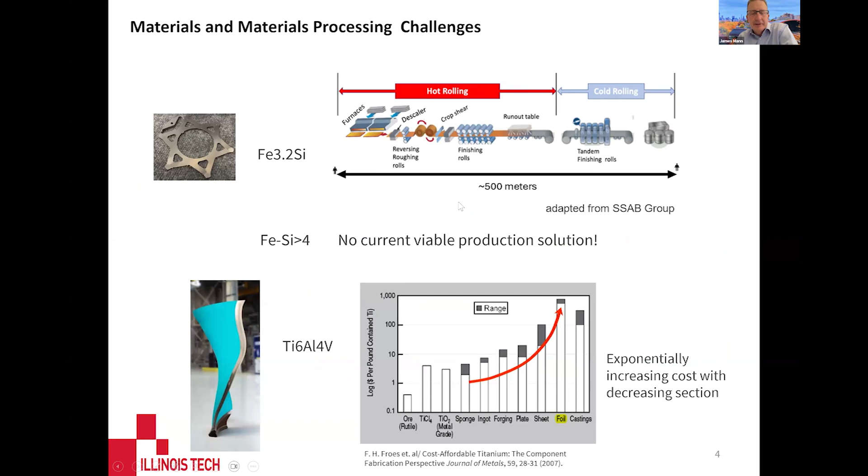Okay, so today I'm going to talk about machining-based deformation processing of materials, or materials manufacturing by machining-based deformation processing, here at the Wilson Science and Technology Forum. I'm James Mann from Illinois Institute of Technology. My computer is not responding, so now it's jumped three slides deep. I'm waiting for it to queue back, so I apologize. Let me try it again here.

Okay, so advanced manufacturing today is complicated in many ways, and I'm sure all of you can appreciate this, that we're constantly looking for new ways to become more efficient. Today there are even more concerns around environmental impacts and societal aspects of manufacturing, and developing sustainable systems. And we're also blessed with all of the new interconnectivity with artificial intelligence, Internet of Things, smart systems, and amongst all this, trying to commercialize new technology.

Industry needs, historically and even today, are still centered around manufacturers trying to innovate with new product designs, new processes, and a lot of these products on the screen right here take advantage of materials that all of us, in many ways, have interfaced with over the years. Some of these materials have been around a long time, but others are evolving - stainless steels, nickel alloys, titanium alloys, refractory metals, composites, and ceramics. This picture, or series of pictures, is just an example of a range of different products that all of us benefit from in our lives.

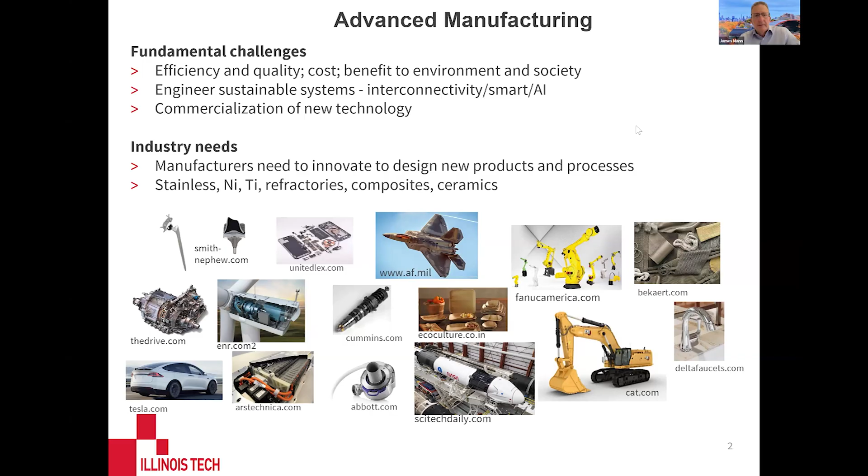And so, one of these areas that is specifically what I'm going to center part of my talk around is the process challenges around high performance materials when they're in a format that is in a sheet, strip, or even wire shape.

There are issues around capability of producing in these formats, embodied energy to actually produce thin section format materials, and high carbon footprint.

An example, some of you may have seen this before, but I like to show these examples to try to ground some of the research. This is a Tesla Plaid electric motor, and it's actually pretty interesting construction. It's comprised of 529 stacked laminates that have this star shape on the rotor, and the bottom picture doesn't show all 529 - it would actually take up the whole length of that shaft.

But it's kind of interesting to think about how those have to be produced. The far right-hand picture shows a thin strip of titanium that protects the leading edge, in this case of a Rolls-Royce turbine fan engine. These are examples of thin section format materials that happen to be very difficult to produce because of the alloys - in this case an electrical steel for the electric motor or a titanium alloy for the protection strip.

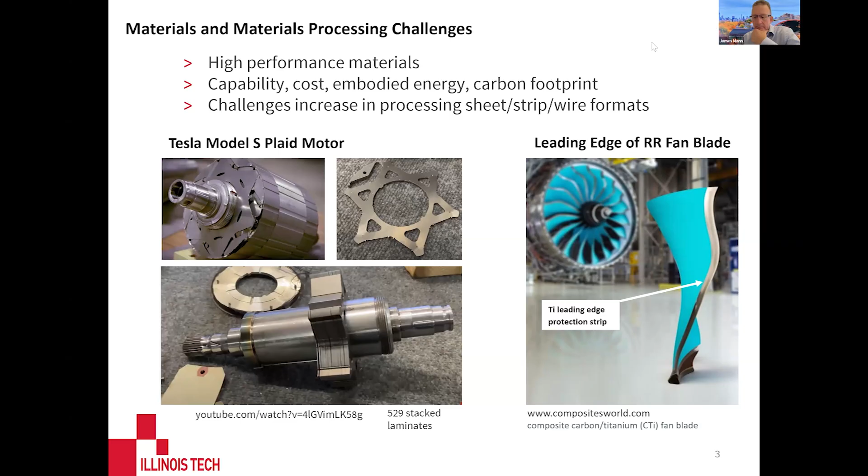So that's why the leading edge has to have a protection system. My screen indexing has paused. I apologize for having a technical issue right now, and I don't know what the reason is. Perhaps you could come out of the presentation and stop share and reshare. I don't know if it's some glitch on our internet. You could mail the presentation to Eddie and he runs it from there. If it becomes a situation, that's our best option. The universal fix is turn it off and then turn it back on. I mean the whole computer. I'm going to reshare. I'm not used to these kinds of glitches, so I apologize.

Let's see, okay we'll try it again. I'm leaving it in this format where it's not in presentation mode. I hope that's okay with all of you. That's okay, because I can use the mouse and key down. So we've already been through these slides.

A little bit about this processing challenge of making these thin section format, in this case, metal alloys. In the case of the electric motor laminate stack, that thin section star-shaped sheet is actually punched out of a coil of electrical steel. Imagine 529 of those are produced to make one Tesla Plaid electric motor. Conventionally, those are typically made from a 3.2% silicon electrical steel.

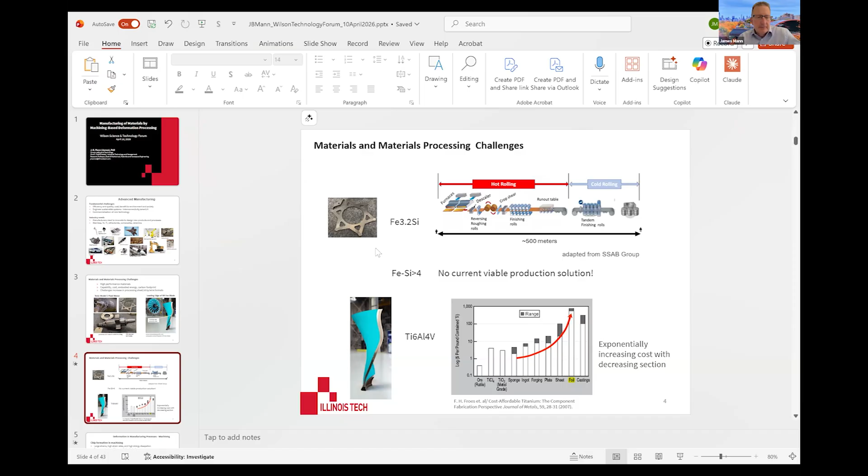In the case of the titanium strip protecting the leading edge of this carbon fiber composite fan blade, the cost of producing titanium in these thin section formats increases exponentially with decreasing section thickness. So it's a cost issue - it's extremely expensive to produce titanium in strips.

So what could be done about this? This is really the basis of my talk - using machining as a deformation-based process to produce materials. I'm going to show you a little video of a machining process. In machining, the process itself is characterized by large strains, high strain rates, high energy dissipation, and involves severe contact conditions, in this case between a tool or die and the interface with the material.

So I'm going to play this little video and... well, I guess we're just going to have to wait.

Well Peter, in a normal composite you start with a fabric basically. It has whatever shape you want, and then you deposit the resin that holds it together. Now his was a carbon fiber composite, so you start with a carbon fabric presumably, but then how do you add the resin to that? I presume it's not a normal resin because that would boil off in these applications. So how does he fix that and stiffen that shape? This is not a high temperature application - this is ambient air temperature because that's a fan blade, not a turbine blade. Okay good, I'm glad you said that.

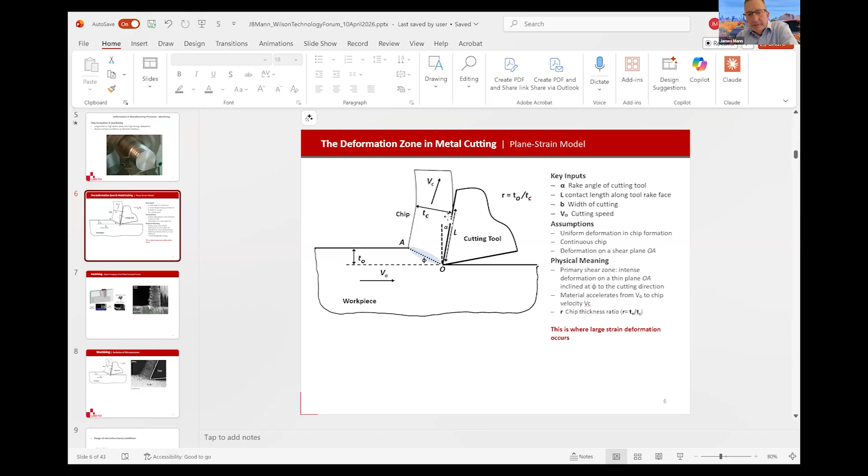Some key things here: the tool is often engaged at some angle we call the rake angle, and this is the shear angle. In the metal cutting problem, one of the challenges is that this shear angle, the strain, is not something we can just calculate. We actually have to know something about the process. We have to, for example, measure the forces in the process to get to the strain, or the velocities, or physically measure this deformed chip. But the diameter is changing as you cut, so you have to figure that one out too.

Going back to this picture, as this tool is plunging into this part, there is a change in the diameter, and so the velocity is changing. But there are ways, in modern machinery, to actually compensate for that by controlling the rotational speed of the workpiece. We often, in our research, look at the metal cutting process as a large strain deformation platform, so we can study what's happening in this cutting framework.

And so we do that by using high-speed digital imaging. We set up a cutting experiment where we can look at this cutting process from the side, so to speak, and we can capture images. It's pretty amazing what we can do today with modern digital image technology - we can capture these images at high speed. Then we can use what's called digital image correlation and actually find the strain directly from the velocity field, and the strain rate as well. It's pretty amazing, we can do this by direct measurement.

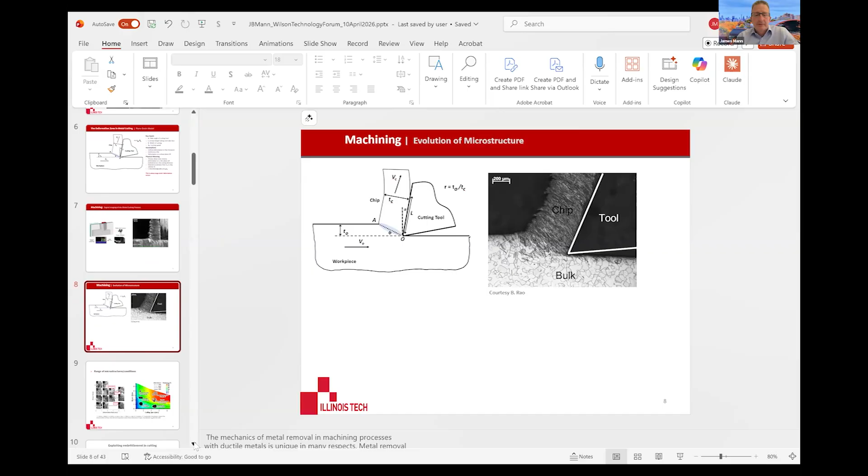That's an interesting aspect of large strain machining: we can not only use it as a potential way to make materials, but also as a way to control the microstructure of those metals and alloys in a new way.

We've demonstrated how we can create twinned microstructures, bimodal microstructures, even recrystallized microstructures, a whole range of capabilities, all through parametric control of the machining process.

Another aspect of what we're working on today is exploiting embrittlement in cutting. This video shows liquid gallium exposed onto an aluminum workpiece. The gallium absorbs into the workpiece and has a drastic influence on the deformation mechanics.

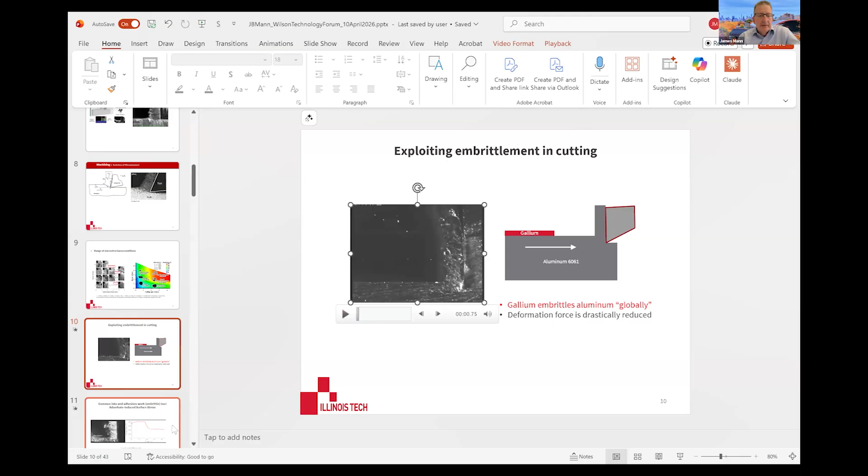It's a fairly well-known phenomenon, but several years ago in our lab, together with my colleagues at Purdue University, as well as Indian Institute of Science and Indian Institute of Technology, we began to explore adsorbate-induced effects, in this case surface stress on the surface of the workpiece.

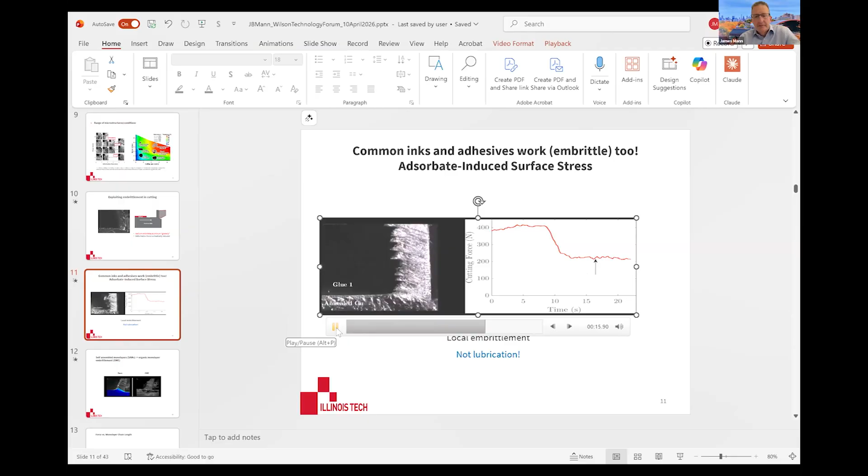This is an example where common inks and adhesives, benign media, can actually be used to embrittle the material. On the left is another example of cutting, and on the right is the force trace in cutting. It's bare, then it hits a surface that has a thin layer of an ink or glue. You can see not only a completely different chip morphology, but the deformation zone changes, and the force required for cutting drops by nearly half, simply by having a thin layer of a benign media on the surface.

This is an interesting phenomenon that we've been exploring, understanding how we could leverage this in our overall approach to materials processing by machining.

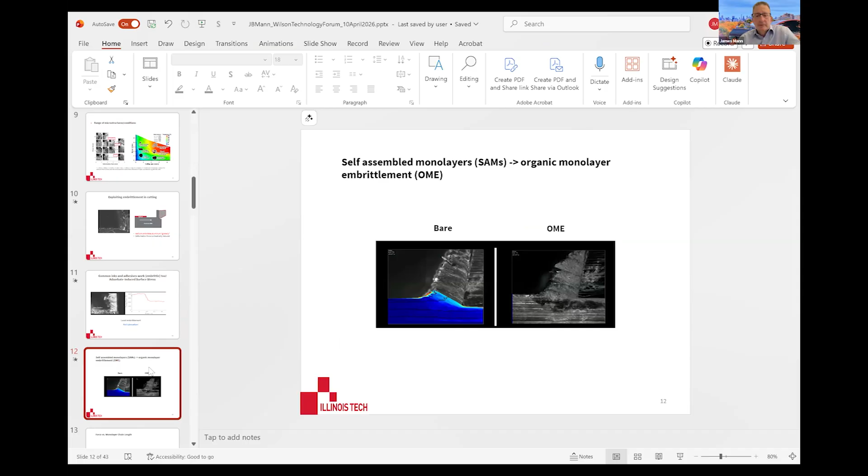It can even be done using self-assembled monolayers, a monolayer of organic media. This is another example using high-speed imagery: on the left is no self-assembled monolayer, on the right is with stearic acid as a monolayer. You can see the drastic effect on not only the shear but the morphology of the chip itself.

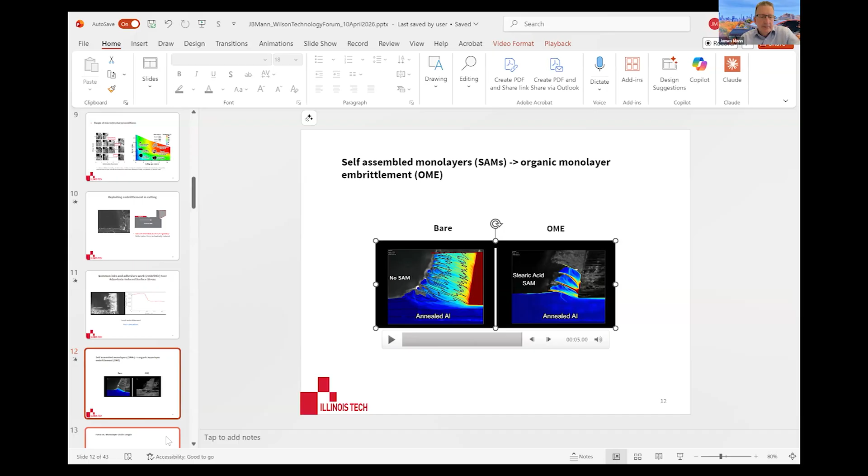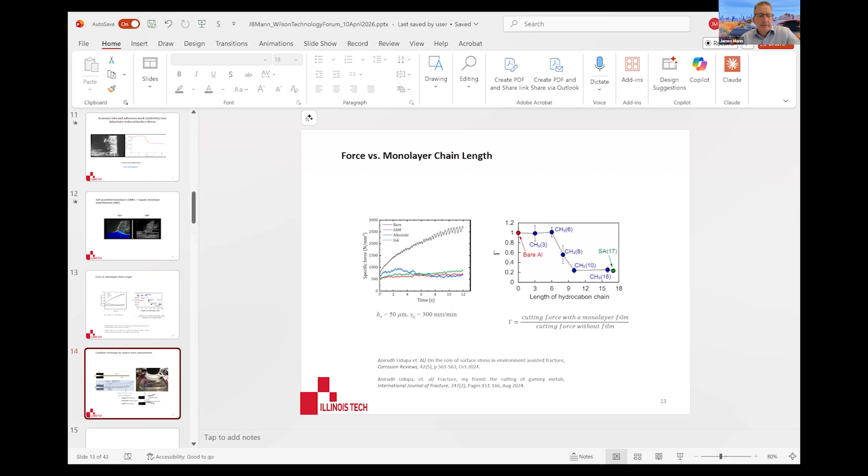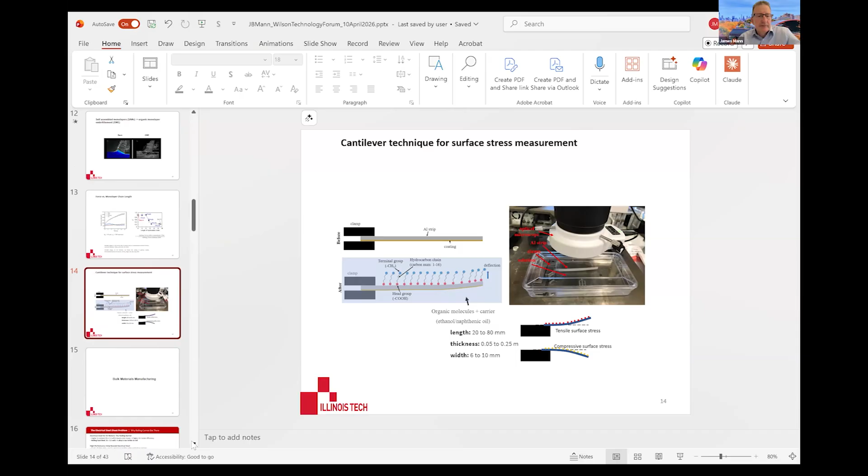Now I'll talk about the bulk manufacturing of materials. Going back to the problem I mentioned earlier, in the steel coil manufacturing business, it's a very large scale, expensive endeavor, and it's only capable of producing steels that have about 3.5% silicon. And then there's the high cost of doing this in something like titanium, for example.

So there's an opportunity to overcome the obstacles in rolling by using metal cutting. What I'm going to show you right now is what we call hybrid cutting extrusion. In hybrid cutting extrusion, we take this otherwise conventional metal cutting process and add an additional constraint.

On this right-hand view, there's this constraint added. You could think of it as another tool directly across from the cutting zone that causes the chip to be extruded at the same time that it's being cut. The thickness of the chip is being controlled a priori, predetermined, and it's smaller than the chip thickness that occurs in normal free cutting. So we're actually constraining it, and this is just a simple view of that.

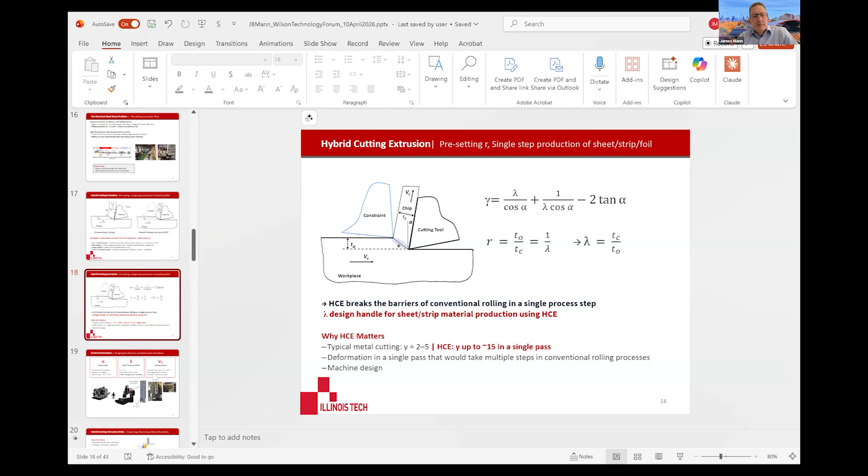This all informs a machine design approach to how this could be accomplished. We now have the ability to make a strip directly by controlling the rake angle of a cutting process, the chip thickness ratio directly because we can set that a priori, and the speed. So we have these three parameters and we can build a machine around this.

But now I want to talk about how we can use machining to produce metal particulate. In the conventional machining process, the tool is typically engaged with a workpiece and a chip is produced, which I've shown you several videos of. But if a superimposed oscillation is applied to the otherwise continuous process, it's possible to divide that process into a series of discrete cutting events.

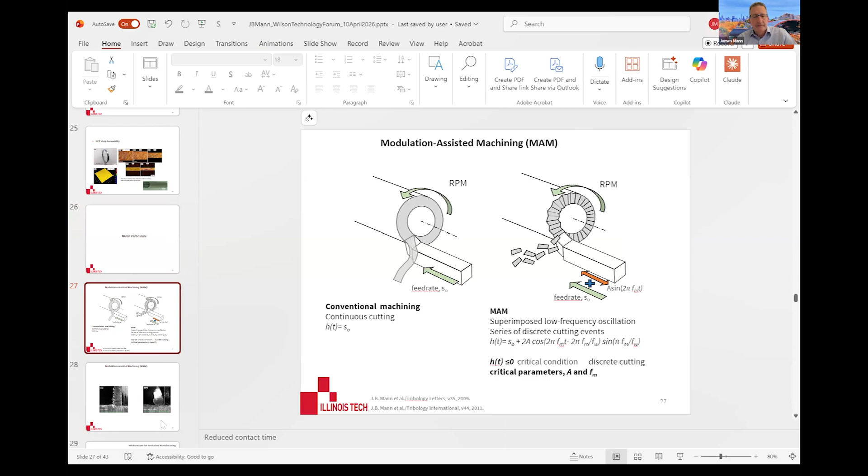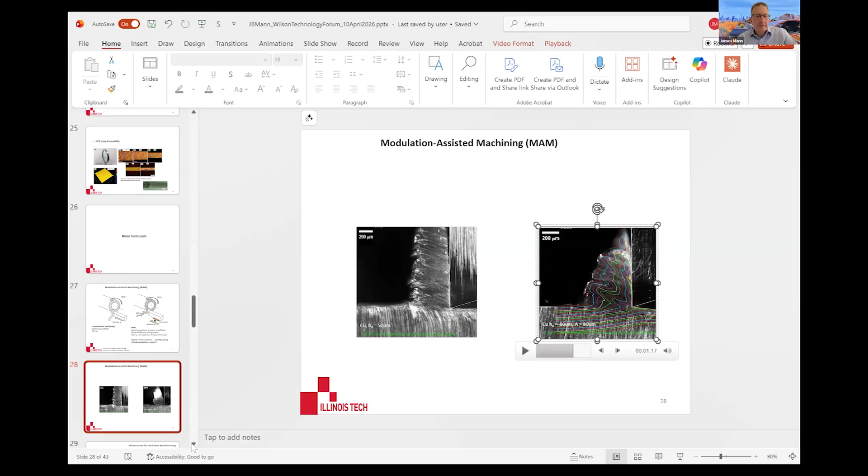In conventional cutting, the tool is engaged and a continuous strip is formed. But in modulation assisted machining, that otherwise continuous cutting is divided into a series of discrete cutting events simply by superimposing a controlled motion onto the process. That's what MAM is.

I'll show you another video example. You saw it was making a strip a moment ago, and then when the modulation was turned on, it began making discrete chips. I'll play it one more time—you see the ribbon, and then the small discrete chips form when the MAM is turned on.

So that can actually be harnessed in a new way to produce metal particulates directly using this modulation assisted machining. We're able to produce unique morphologies that can't be easily produced in other conventional ways. We have generally three categories: equiaxed, platelet, and fiber.

These are SEM images, and you can see from the scale bars that these equiaxed structures are similar in size scale to what might otherwise be called gas atomized metal powders, which are typically spherical or blocky. These are actually more blocky, and not spherical. The platelet is an extended version of an equiaxed particle by changing one dimension, and finally the fiber is at the extreme end of producing these discrete particles.

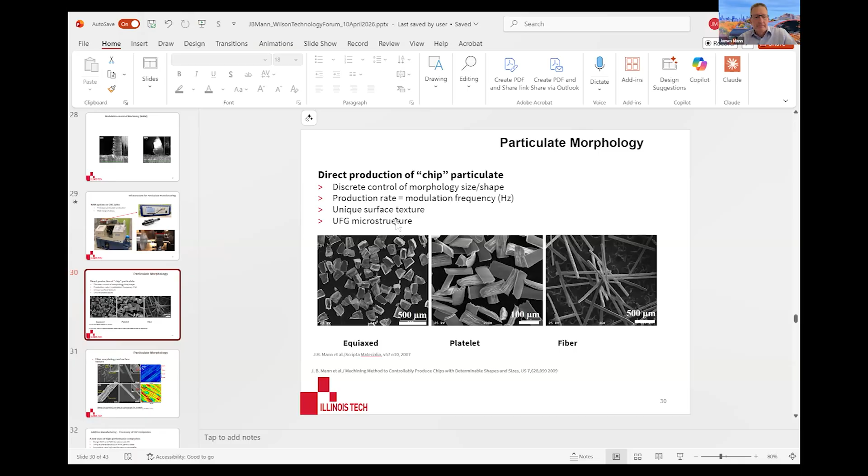Here's a little more about the morphology—this happens to be the fiber, with some more SEM images. The fiber has a unique cross section, shown here in the inset. We refer to the cross section sometimes as triangular. It's definitely not round—nothing like a conventional drawn metal fiber.

It also has some really unique surface topography. On one side of the fiber, the side made by engagement with the cutting tool, it's actually very smooth. These are optical graphs from profilometry, just showing comparative scale. The other side of the fiber has this interesting corrugated texture.

One thing I want to point out is that on the smooth side—in picture C, the middle row at the top—it has characteristic little lines that are the feed lines created by the edge of the cutting tool. The back side of the fiber is the free side, and it has the orientation of these corrugated lines. The orientation of the lay is actually opposite to the direction of the fine lines on the smooth side. So, just some interesting morphology.

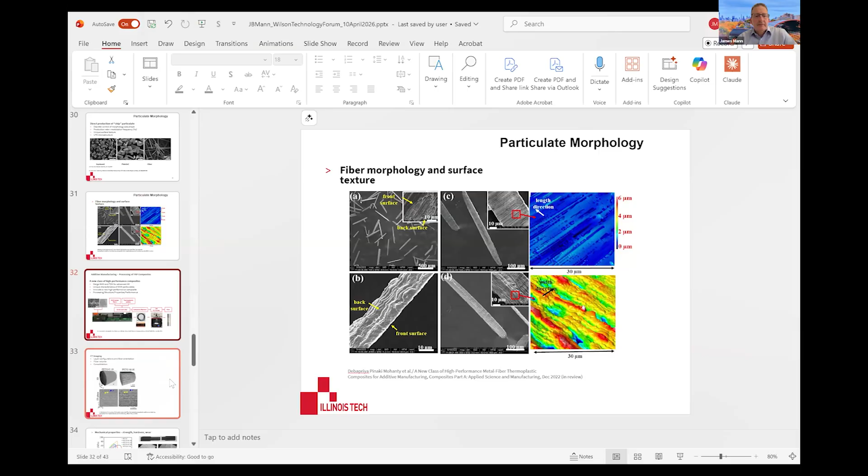We began to think there's something unique about this—how can we take advantage of these fibers in a new way? We decided we could use them in a new composite structure, a composite system, and began to produce thermoplastic filaments that could be used in additive manufacturing or 3D printing.

We refer to this as a new class of high-performance composites, where we merge the capabilities of modulation assisted machining to manufacture the metal fiber, and use the fused deposition modeling, or 3D printing process, as a way to make a new composite structure.

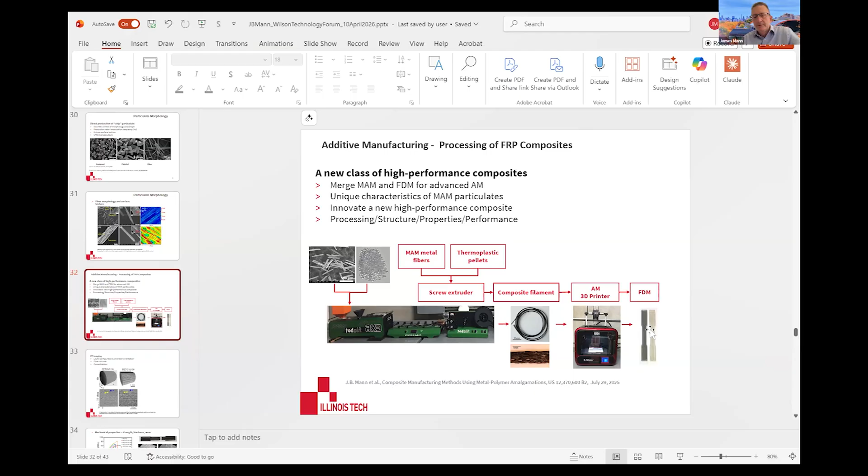This slide shows a simple laboratory framework. We take metal fiber and combine it with thermoplastic pellet, extrude that into a composite filament, and then 3D print tensile test samples or any sample we prefer to produce.

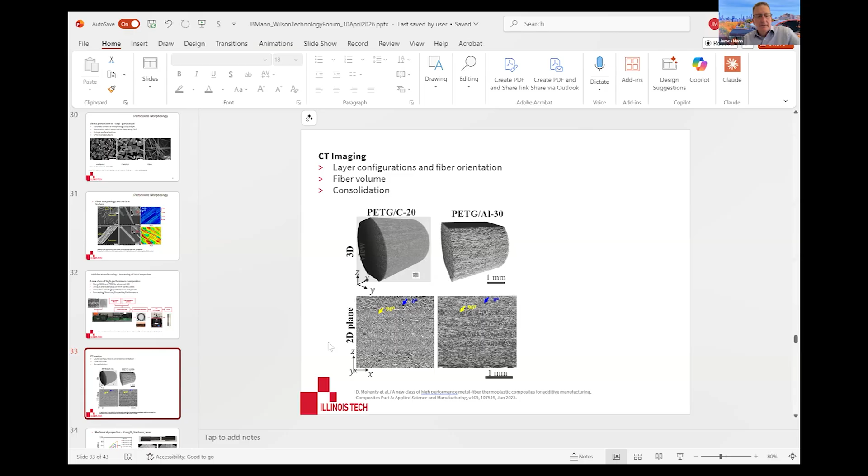Continuing on with the tensile testing of these dog bones, looking at the actual mechanical properties, trying to understand what is the benefit of adding this metal fiber.

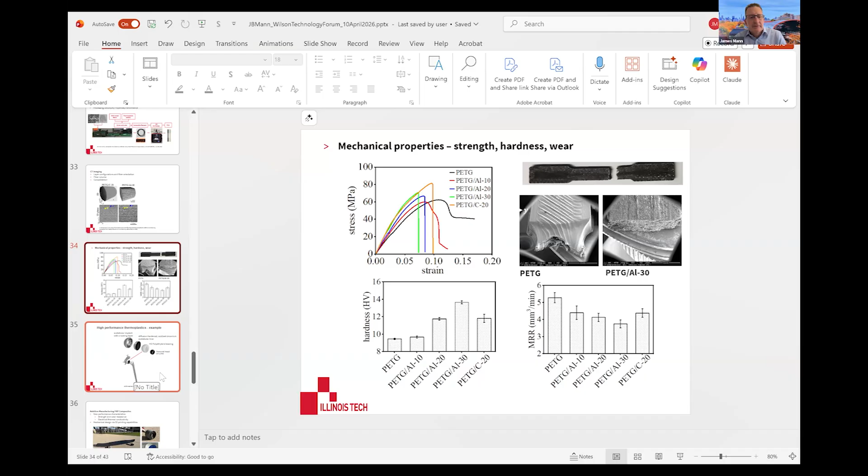These are interesting results we're pursuing to understand more about not only the mechanical properties, but we're also doing work now to understand the physical properties, including things like thermal and electrical conductivity, looking at potential application domains. Why is this possibly relevant?

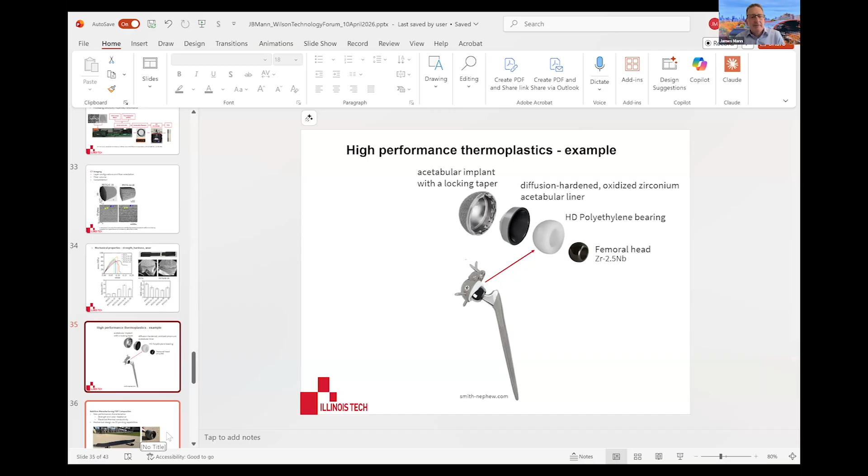I'd like to thank all of you for your time. This is by no means an exhaustive list, but I wanted to mention some of my co-principal investigators today.

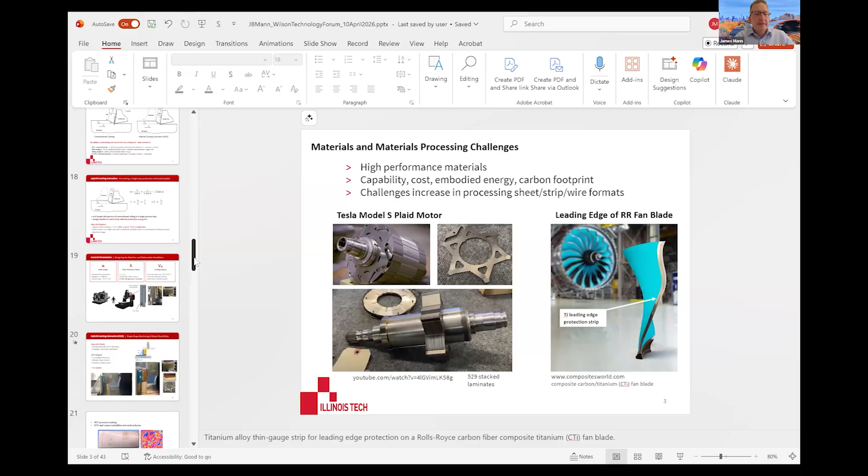But it seems like photography or imagery is a big part of that too. Well, the image analysis I've been reviewing certainly opened the door for us to understand the fundamentals of what happens in the strain and cutting. This is a problem many of us in my research sector have been studying—I've been researching the fundamentals of metal cutting for almost 40 years. It's not a new problem, but we now have new techniques and tools to characterize it in ways we didn't have before.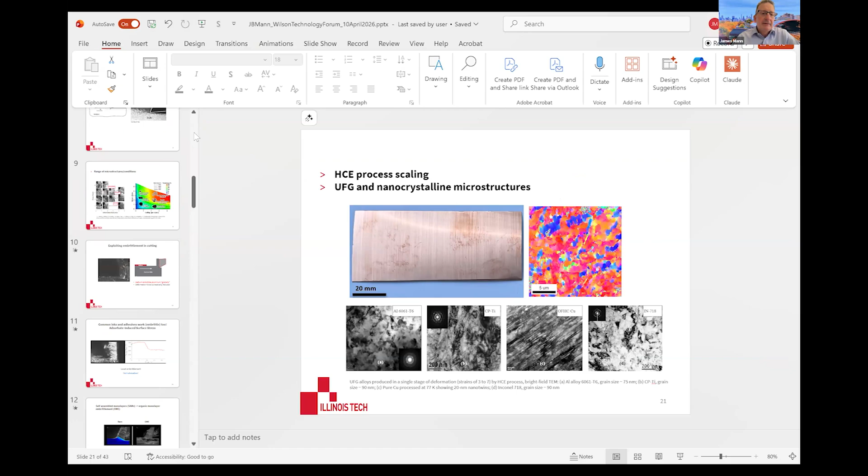So going back to the map, I'm controlling the shear strain and the deformation rate. I can decide which of these structures I want to achieve, and that is repeatable.

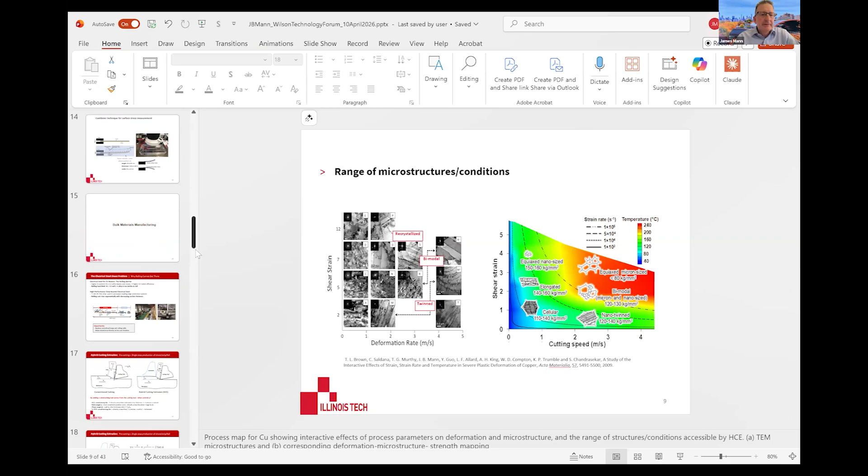How about at a given set of machining parameters, what's the uniformity across the strip? Through the thickness, at different locations? Let me show you a picture I didn't show earlier - it's a good question. Here's a series of images.

This happens to be a strip of aluminum, picture A. You can see the series of images on the right-hand side. The first image is what's called HCE, hybrid cutting extrusion. You're asking about the uniformity through the thickness.

You can see at the edges, or at the strip walls if you want to call it that, the top and bottom of the strip, the actual shear imposes a little bit of a flow orientation at the faces of the strip. As that strip is rolled, that gets a little bit more pronounced, but it's a very subtle change in the shear flow at the faces of the strip.

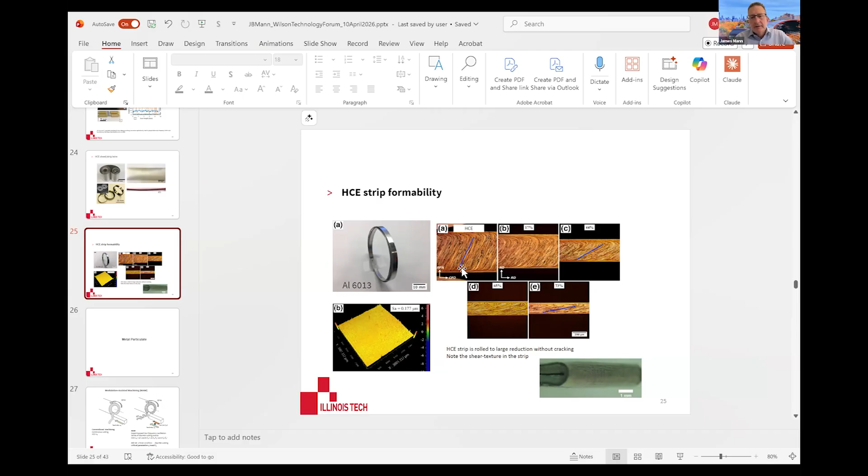That's something I don't have pictures here to show, but by imposing different conditions on the position of the constraint tool, we can actually create different hydrostatic stress states, and that can change how consistent it is across the thickness. This shows it's generally consistent, not 100%, but at the strip edges there's a little bit of a difference in shear flow.

But the thing that's maybe more important to take away here - and I don't have a picture of normal rolling to show you - is that the normal texture orientation in rolling is in the direction of rolling, and that's the only direction you can achieve in rolling. But in this metal cutting configuration, using hybrid cutting extrusion, we can actually influence the orientation of the microstructure, the orientation of the shear. So we get these different shear flows.

But these are strips - this is showing what happens when we roll that strip. You can see that the orientation of the shear flow begins to go in the longitudinal direction. That's just the result of rolling. Pictures B, C, D, and E are taking that strip and rolling it through subsequent rolling steps. But rolling has the characteristic orientation that's always in the rolling direction - that's actually a limitation of the rolling process as well. It does not have the ability to actually control orientations the way HCE does.

Thank you, Albert. Jim, very nice. I'm glad you emphasized the importance of that constraint, because without it, the other side of that strip didn't look too good in your pictures. I presume it's because the stress wave reflects off an open surface, so you get a reflection wave, and that's really ruining the structure of the backside that is not constrained.

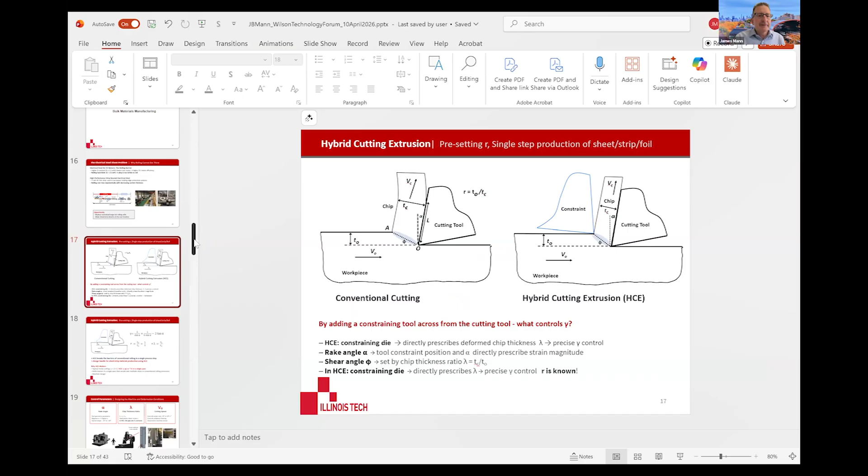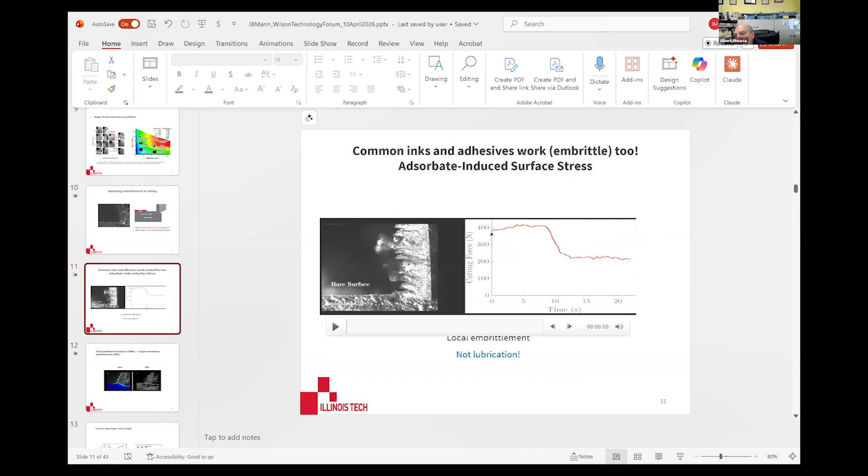Yeah, if it's unconstrained - I don't recall if there's a good picture here to show what the surface looks like, but a typical video is an example. Yeah, it's not good at all. In fact, going back to the original video I started this presentation with, talking about this cutting process that informed everything I've been discussing - that strip would be a very poor quality strip on what we'd call the free side.

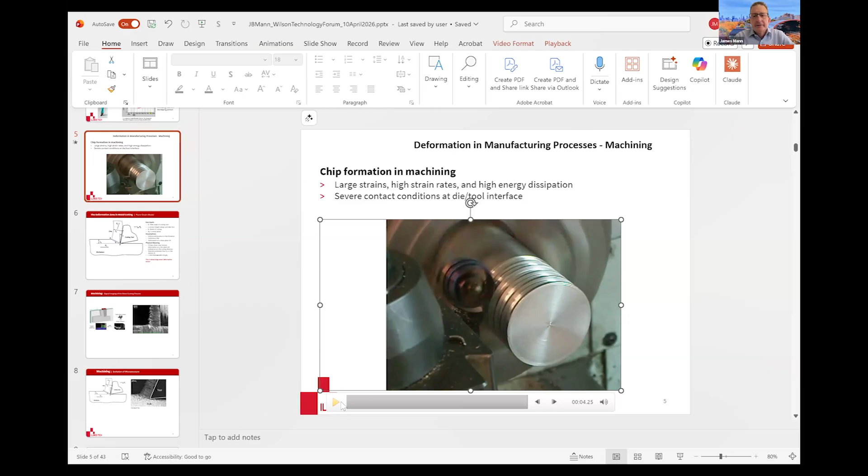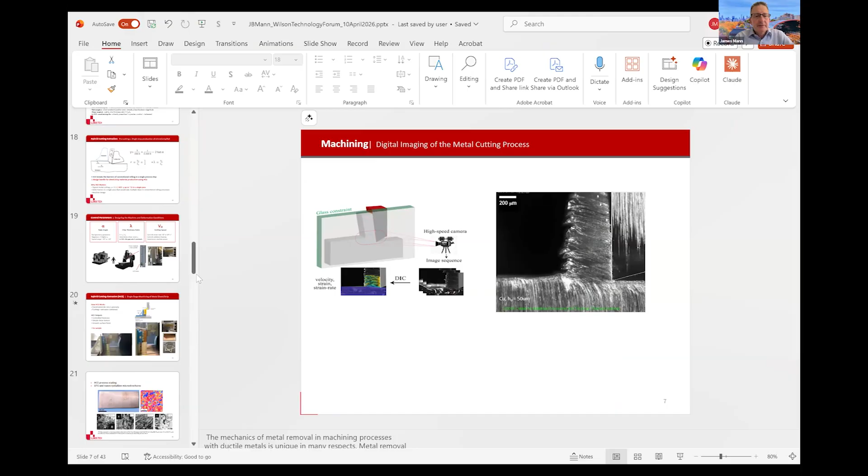The roughness would be very poor and not acceptable. Correct. So that's one of the key elements of the HCE process: it controls the strip thickness, but it also confers a finish. Going back to this picture, we compare these finishes often. There's subtle differences between the constraint side and the rake face side, but they're both better than a conventional rolled surface. So the strip itself has both sides smooth, with surface roughness better than a rolled surface.

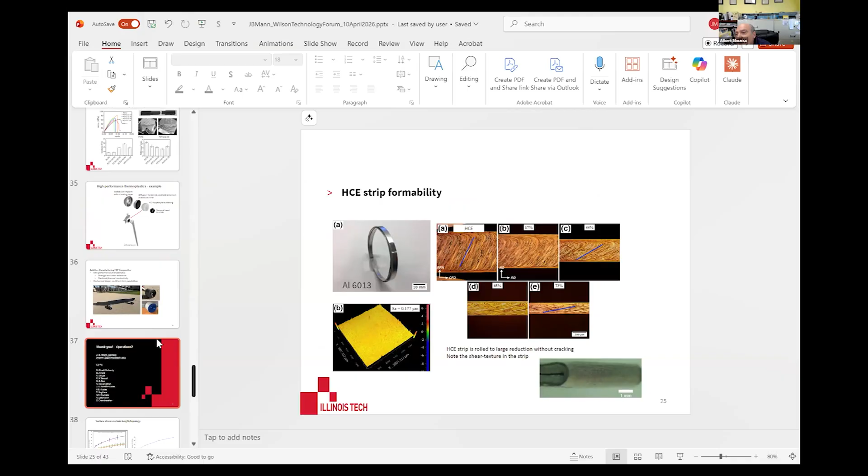Okay, and I understand the importance of additive manufacturing and 3D printing, and you fit right into that. But my question is, purely from an energy point of view, how would this process compare to just standard rolling on a per square foot basis?

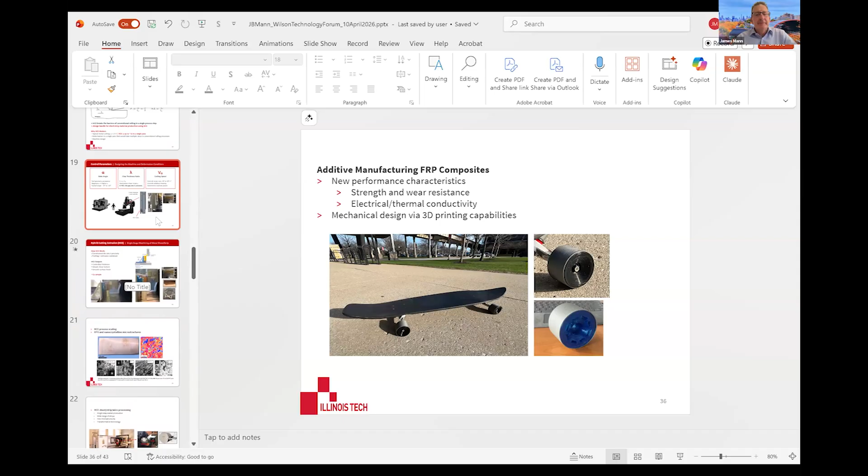Well, I don't know that I can directly answer that question. I would have to make the comparison one-on-one to the same size requirement, the same volume.

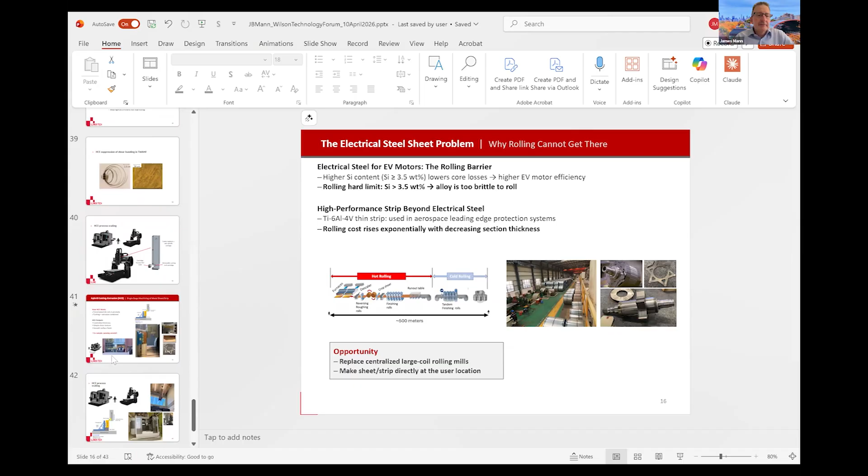What I can say is that the infrastructure required to produce the electrical steel, you saw what that looks like as an example of making these steel coils. All we need from that is this small star-shaped part. So today, to make this small star-shaped part, we're producing these giant coils, and then the coils have to be stamped to produce the small scale part. We're able to produce the size scale of part needed today in an infrastructure instead of being 500 meters in scale with costs in the tens of millions. We're doing that in one machine that only takes up 5 square meters and costs in the hundreds of thousands.

But you still have to stamp it. It still has to be stamped, yeah, and that could be done in line as well. At the end of the day, the motor manufacturer today has to get the coil, bring it in house, and then stamp it. They're using the format of a coil that might not be optimal for the actual size of their stamping, and so there are yield effects too. There are yield losses that occur because they're stuck with making it from, say, a 48-inch wide coil. Whereas the HCE process can produce the width of the strip to be optimal for what's needed to stamp the part, so the losses due to yield are reduced.

Understood. And of course, the difference in equipment and machinery is remarkable. But could you, just from the final state of the deformation, back out how much energy went in? And you're saying it's not quite the same.

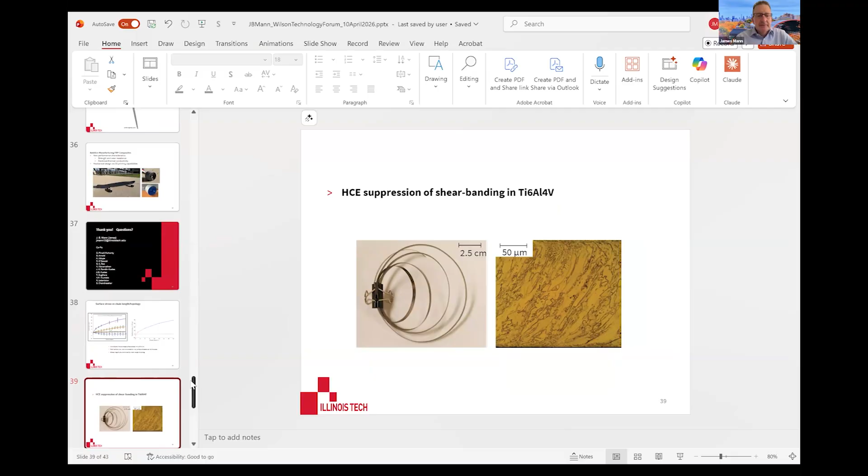Yeah, so I don't have that slide in this presentation, but the total energy dissipation for the HCE process—the total energy dissipated to produce the strip is about one-third of the energy dissipated, or consumed, in making rolled strip. That was actually an analysis we did with our partners at Oak Ridge, and there's a report on this, but the total energy is about one-third. So that's another remarkable impact. That goes back to this carbon footprint, total energy consumption, simply because we're doing this in a single step.

Whereas the normal rolling process is a whole series of accumulated deformation steps that have significant energy, as well as annealing processes that consume significant energy in between the rolling steps. So we're not doing any of that annealing, we're not using furnaces and so forth to create the strip. So it's a very good question, and that's actually something we've written several publications and reports on, about the total energy dissipation. Very nice, thank you.

I'm just wondering, how wide a strip can you print, or can you make, without losing efficacy? Yeah, I mean, the only limitation in the width is power. So this strip making process by HCE—I'm showing here something that was 100 millimeters wide.

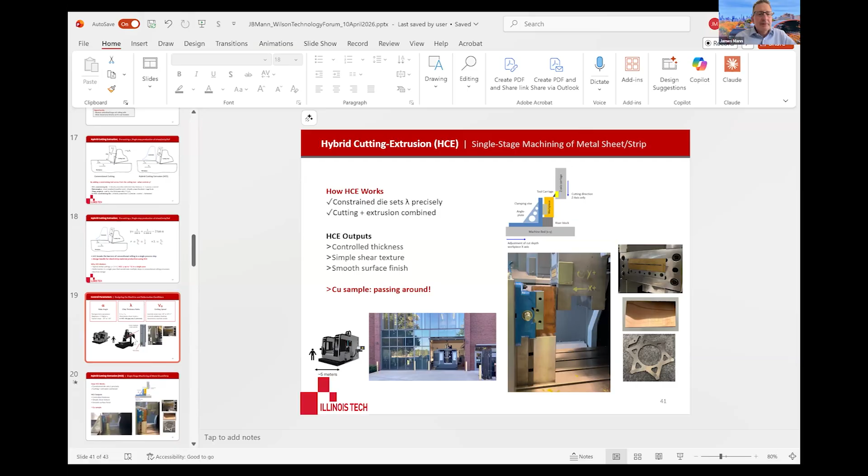The other beautiful thing about this HCE process is you can use first principles directly to determine what the machine design element should be. It's very interesting in that sense because there is no limitation. It's a matter of how large a power you can put behind the machine, and how big a machine is needed.

So for example, if you asked me, could we produce a strip that was 1,000 millimeters wide? It simply is taking this machine design configuration and scaling it accordingly. I've worked around machines in the aerospace industry that are built into the foundation of the facility—huge. So it's not unrealistic. I've even seen machines that have 500 horsepower motors. This machine that is cutting this strip has a 10 horsepower motor.

And I assume that by scaling down, the manpower required is a lot less than the maintenance as well. Yeah, it's just a remarkable way to look at how this technology could disrupt an entrenched industrial process from all kinds of perspectives - engineering, maintenance, flexibility, ease of relocation, infrastructure costs, time to build, in other words, time to bring a plant online. That's a whole interesting range of things.

At the end of the day, it's based on a fundamental cutting process - metal cutting is very well known today in industry in terms of characterizing tool life, when to change the tools. Of course there will be these kinds of things in the process, the tools would have to be changed at some interval, but these things are all very engineered. It's very accommodative to engineering principles.

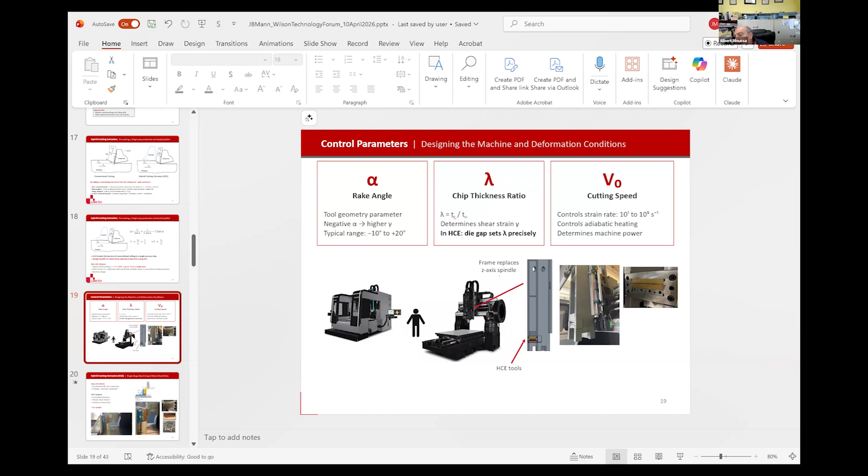What material, Jim, do you use? On the point of scale up, yes - if you really want to get a large width, like Eddie's asking about, then you have to rotate a huge initial piece. Well, here we're not rotating the workpiece at all. That's the whole point. You're just advancing your cutter. Yeah, that's what's happening - we're just cutting the strip directly from a billet.

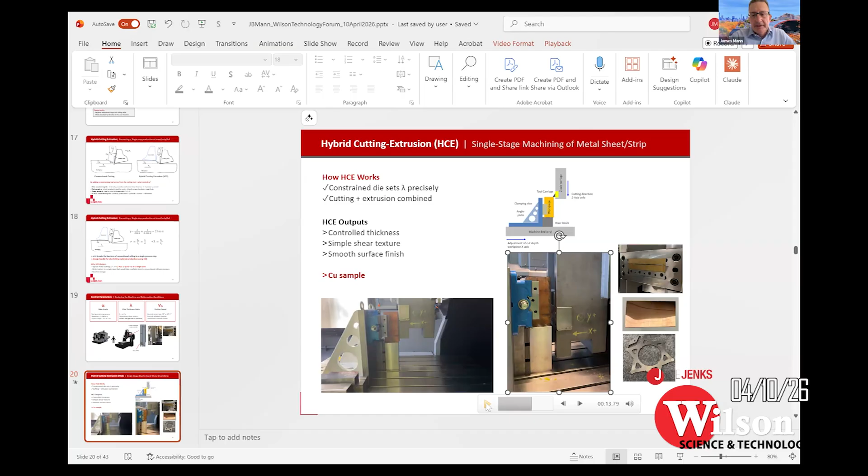So we're able to produce the strip directly from, it could be a casting, a forging, a billet. It's not rotating. Now, there are some configurations where we have rotated, for a different reason, but this strip to make these sheets is a discrete process. So all the photographs you showed us are for a non-rotating case, is that correct?

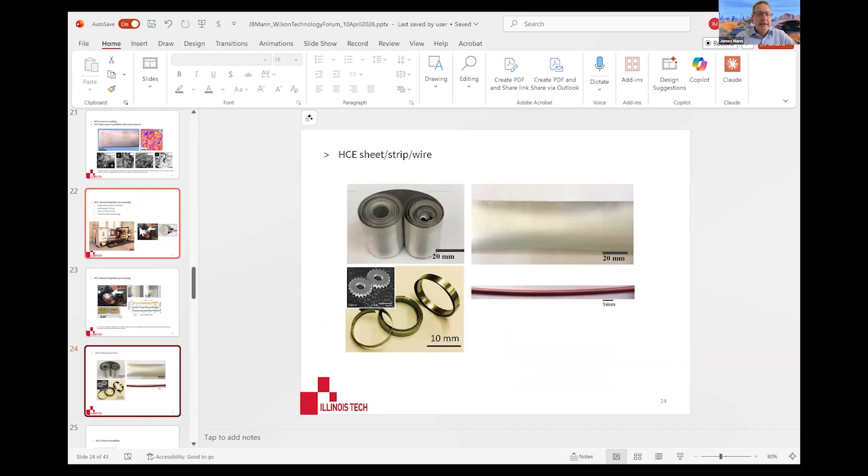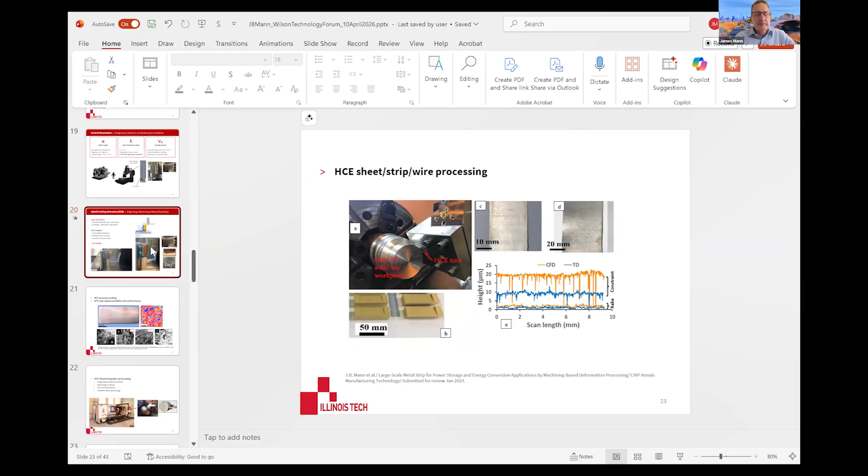So the HCE process can actually be introduced in the case of a rotating workpiece, to make it a somewhat semi-continuous process to make, for example, a really long strip. This could be used, for example, to make the strip needed for the leading edge protection system on the Rolls-Royce turbofan engine that I was showing. But in the case of the star-shaped part needed for the electric motor, it doesn't need to be a rotating process.

There are many advantages for it to be this discrete process like this. But you're right, if it was huge - if I needed to make a really long strip, like hundreds of meters - that's not practical for this configuration of HCE. We would look at the rotating system, and then yes, you have to accommodate something that might be rotating, and it could be large, but it's all possible. That's an engineering problem.

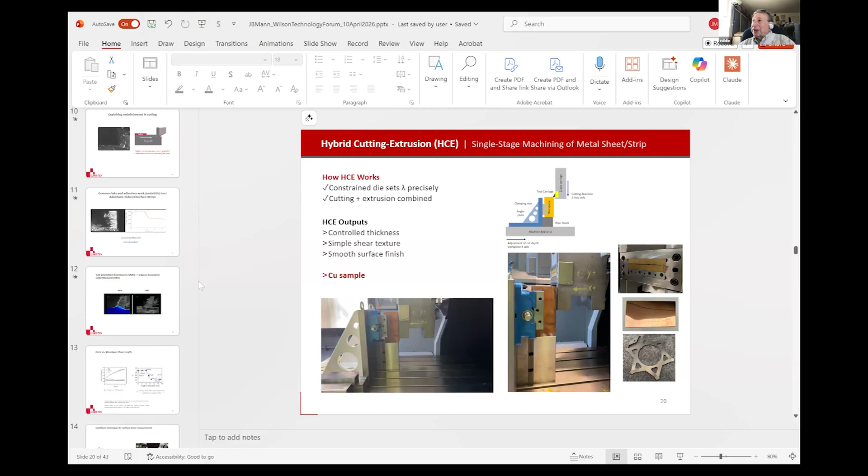Actually, I would have liked to have heard a lot more about the drilling capabilities. I'd be happy to rejoin your group at another time and do that. Because I'm kind of interested whether it has applications into advanced geothermal drilling, for example. I don't know if that's something you have considered or has been considered.

We actually have a proposal in with colleagues at Ames and at Sandia to the DOE directly for application for these site investigations for rare earth elements, to actually improve the core drilling processes using aspects of modulation assisted machining.

Well, I'll talk to Ron and maybe we'll have you back. Yeah, that'd be great, and really appreciate everyone's time today. And my apologies for the technical glitches. I don't have any excuse. It's not your excuse to make. I think that might happen to Microsoft and others. Yes, I guess we thank them for that. Be glad that we're not traveling on the Artemis - I've understood they have some issues of some kind related to this, but at any rate.